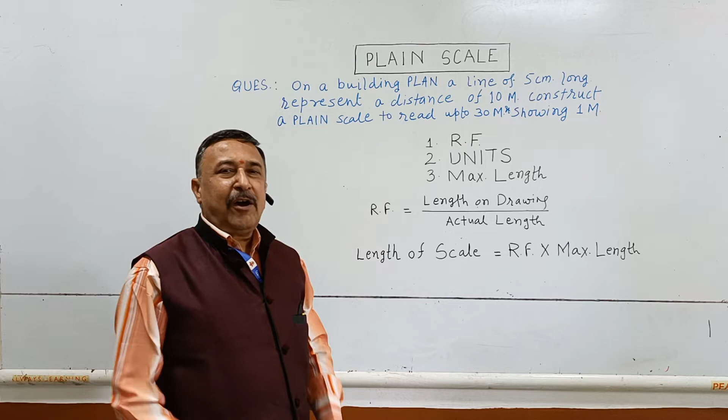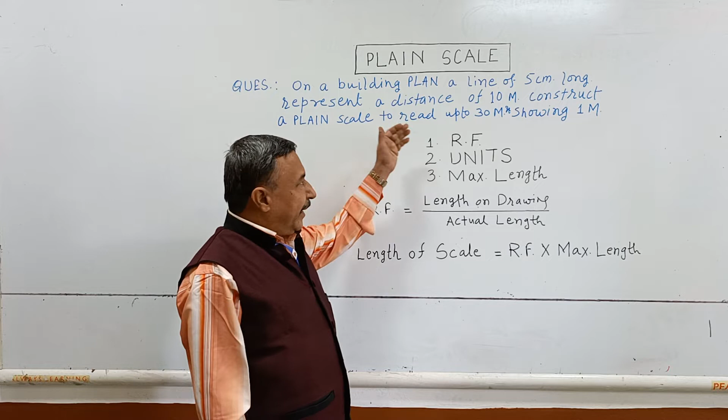Today I am going to solve a question of plain scale. As already everything is discussed in the last chapters, we know what is RF, we know what is units, what is maximum length. Okay, and these three are specifications of scales. Now just look at a question.

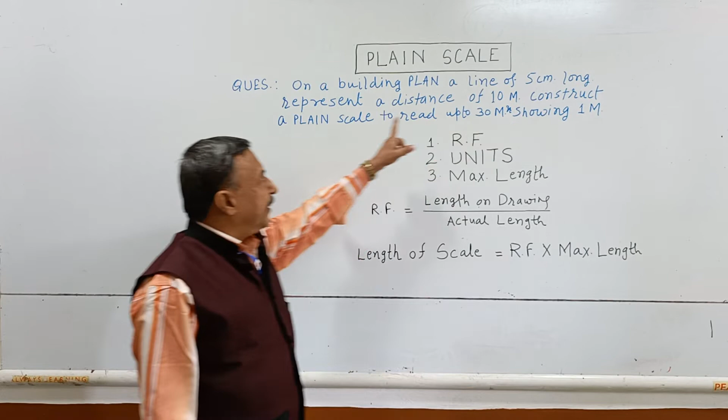What is our problem? On a building plan, a line of 5 cm long represents a distance of 10 meter. So by this line you can understand that a 5 cm long line on drawing represents a distance of 10 meter.

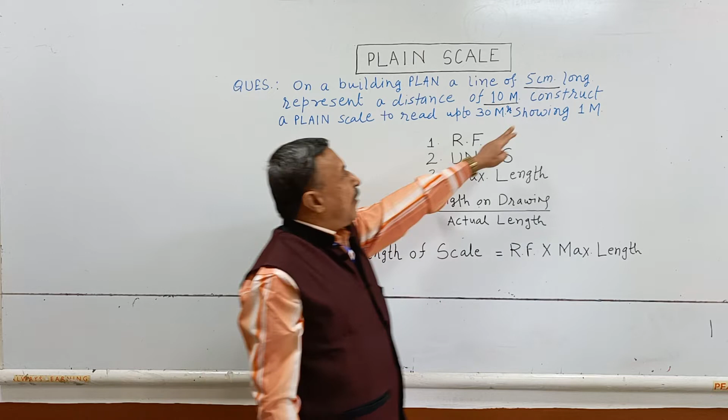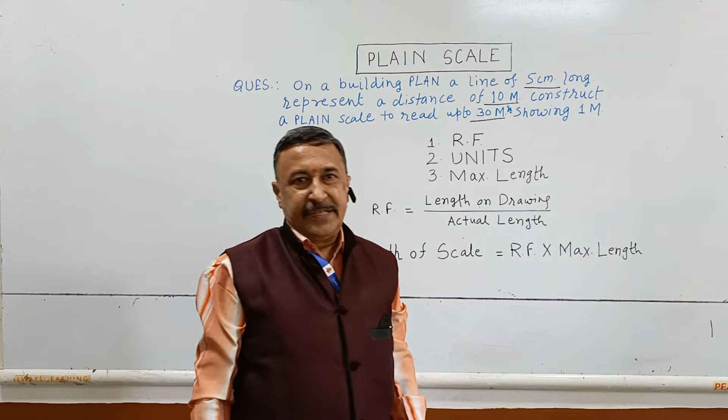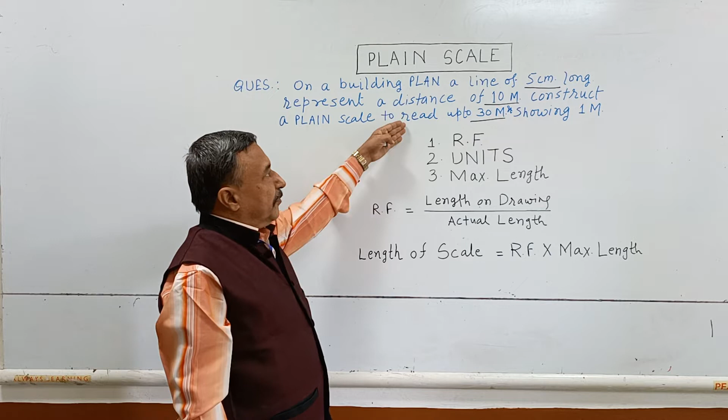Okay. Now construct a plain scale to read up to 30 meter. Read up to 30 meter means this is our maximum distance, and showing 1 meter. So the minimum distance we have to show on the scale is 1 meter. Now we start to solve the problem. Now see what are the steps in which we have to solve the problem.

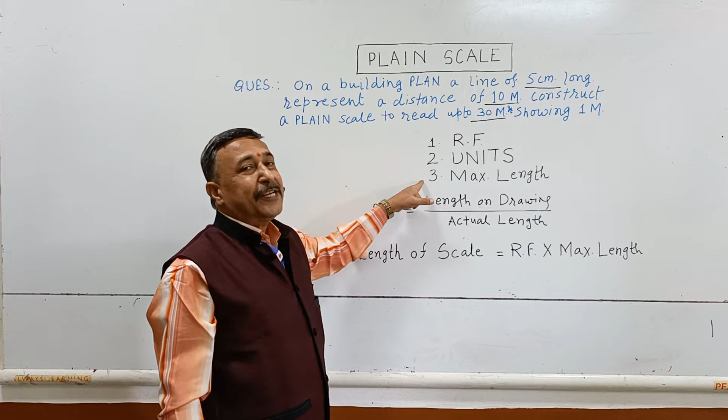These three are specifications of scale: RF, units and maximum length. And just think about this by reading the question. Now RF. RF is equal to length on drawing upon actual length. This formula we can use to find the RF.

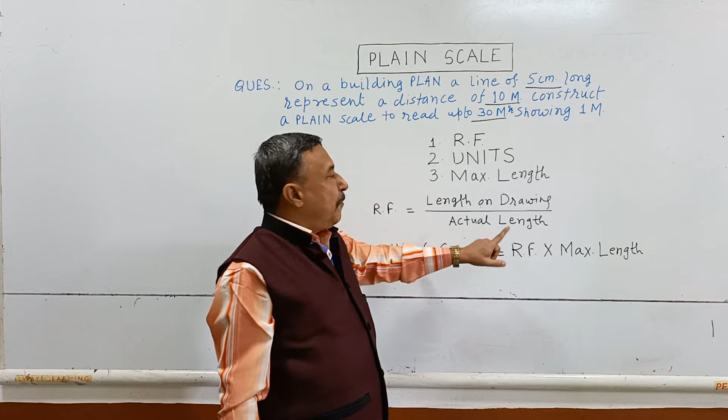Now see, length on drawing is given 5 cm and actual length is 10 meter. These two data are given for finding the value of RF. Now RF is equal to 5 cm divided by 10 meter. Now we can simplify it.

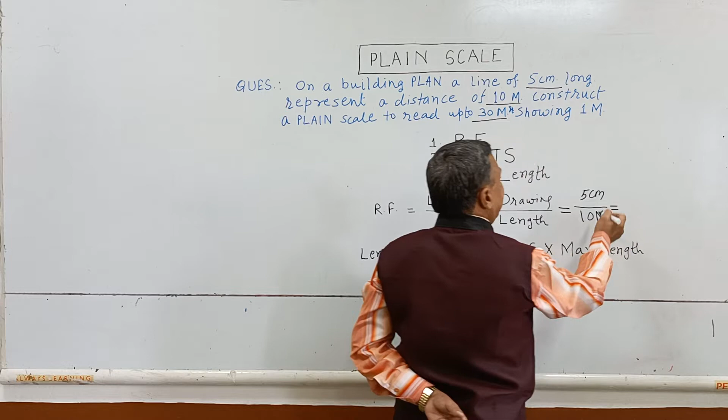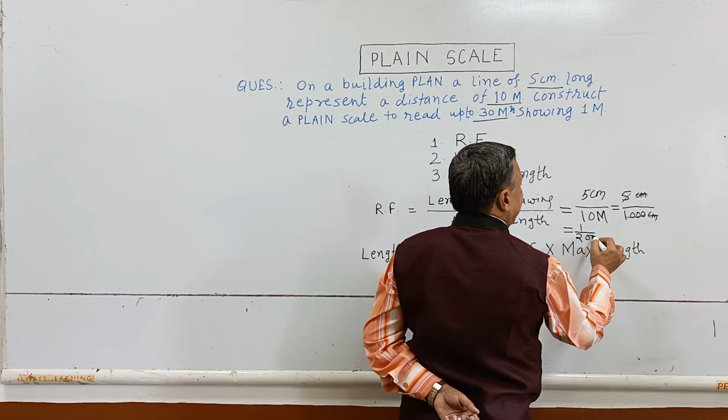Now how do we simplify it? We just convert this into centimeter, means both units can be cancelled. As you know, RF has no unit. So this is 5 upon 1000. We further simplify: centimeter divided by centimeter, this centimeter cancelled, and the final value is 1 upon 200. 1 upon 200. So in this way we calculate RF.

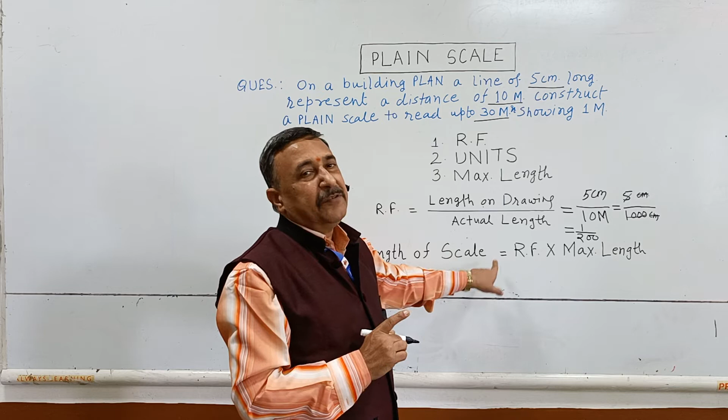Now the second step, we go to find the length of scale. This is very important, because if 5 cm represents 10 meter, then for drawing a scale of 30 meter, what is the length of scale? That we should find. So length of scale is equal to simply RF multiplied by maximum length.

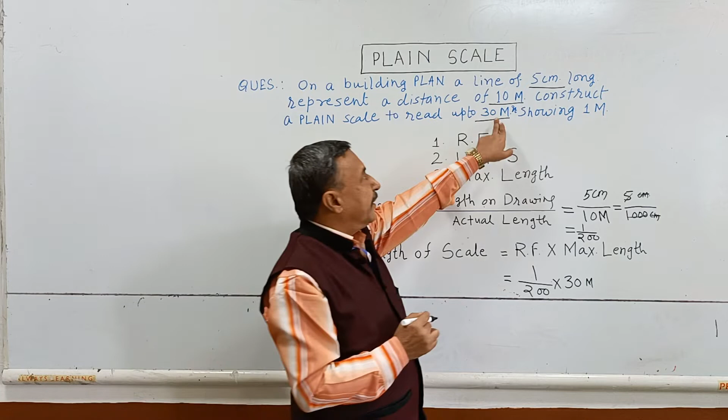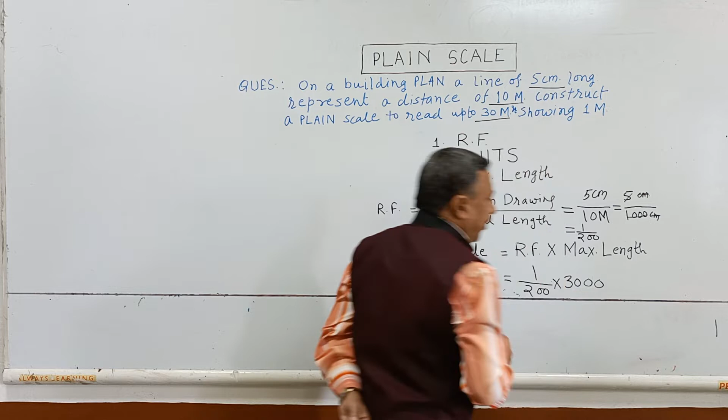So our RF is calculated here. So we write here RF, multiplied by maximum length, that is 30 meter. 30 meter is our maximum length. Now first of all we convert this 30 meter into centimeter, because we have available a conventional scale showing the centimeter unit. So we convert this into centimeter. Now further calculate.

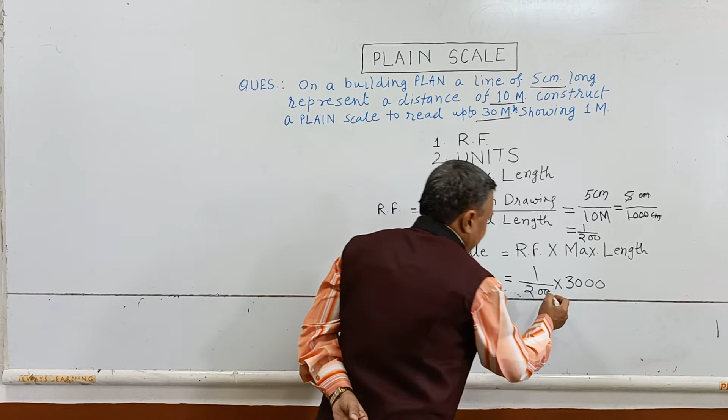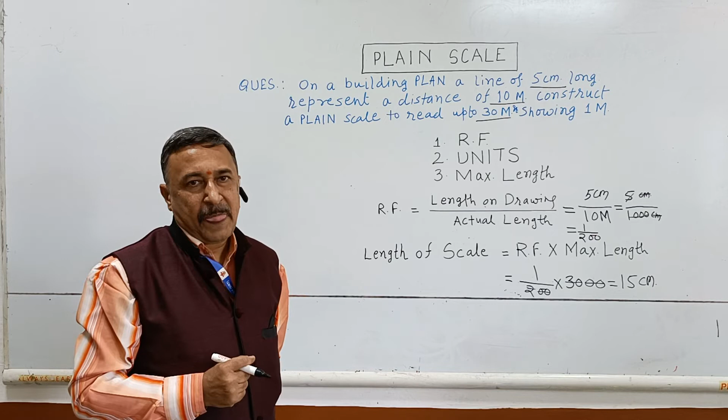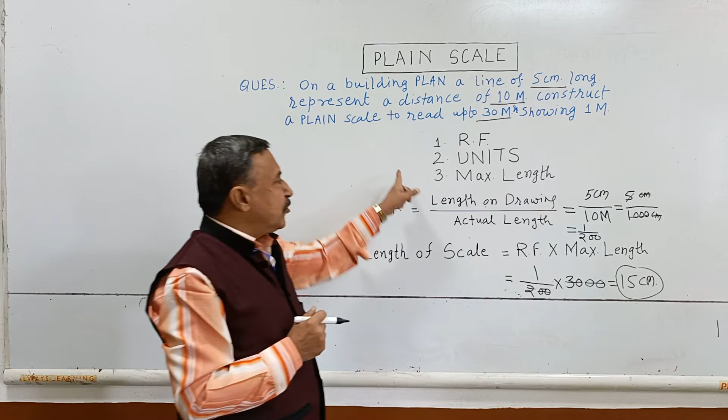We get 15 centimeter. So this is our main data which is used for drawing the scale. Now the length of scale in our case is 15 centimeter. Okay. So these two steps are compulsory to solve. After that we go for drawing the scales. Now we start drawing scales.

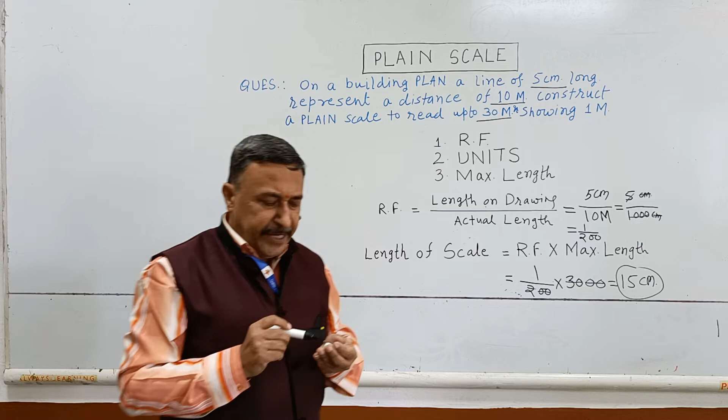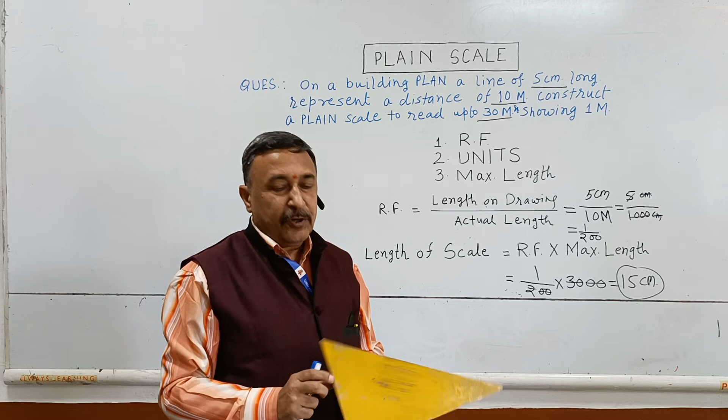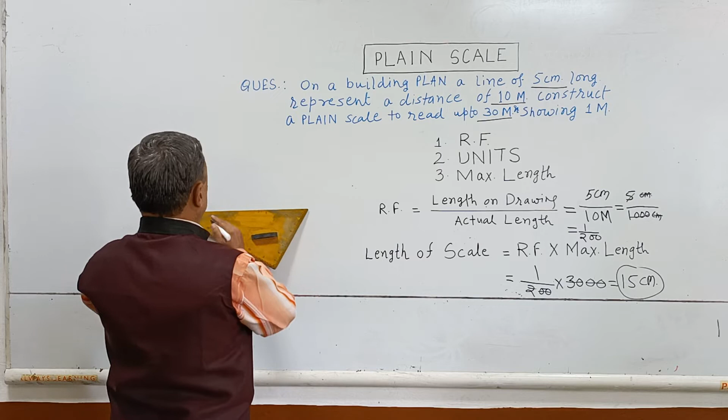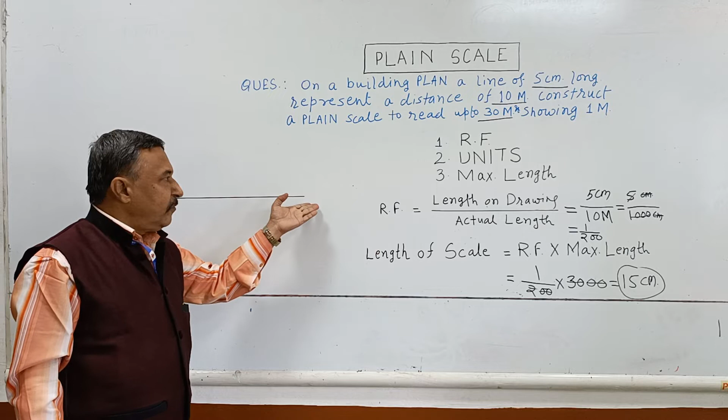The maximum length of scale is 15 centimeter. So draw a scale of 15 centimeter. This length is 15 centimeter. So simply construct a line of 15 centimeter. Now convert this into such a picture which gives the look of a scale. How?

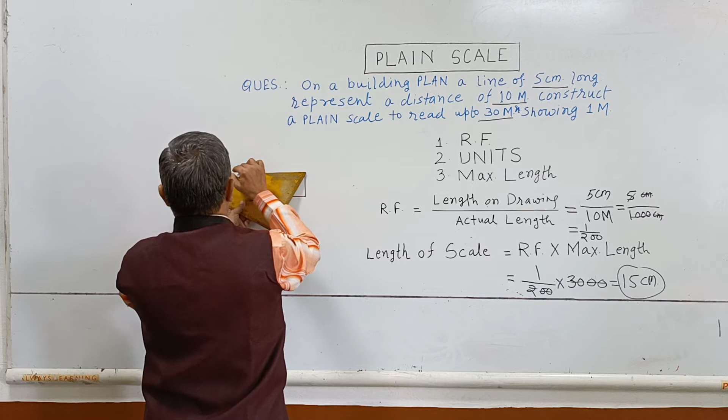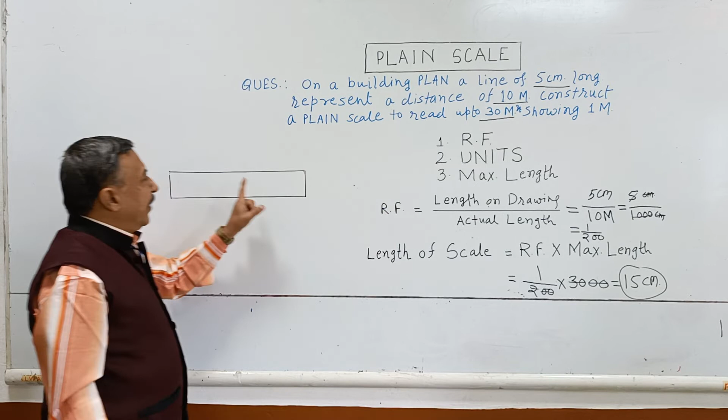Now see, this looks like a scale. So this is our scale of 15 centimeter which represents 30 meter length. Now we start to construct the scale. Now see here, showing 1 meter. So how do we find 1 meter from 30 meter in a plain scale?

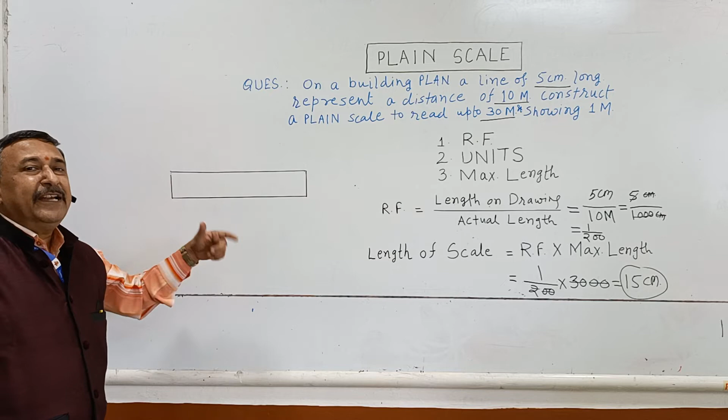As you know, a plain scale has 2 units. So what is the meaning of 2 units? It is twice divided. This scale is mainly twice divided. So first it is divided into some equal number of parts. Then again the first part is subdivided into some equal number of parts, so that we can show 1 meter minimum distance.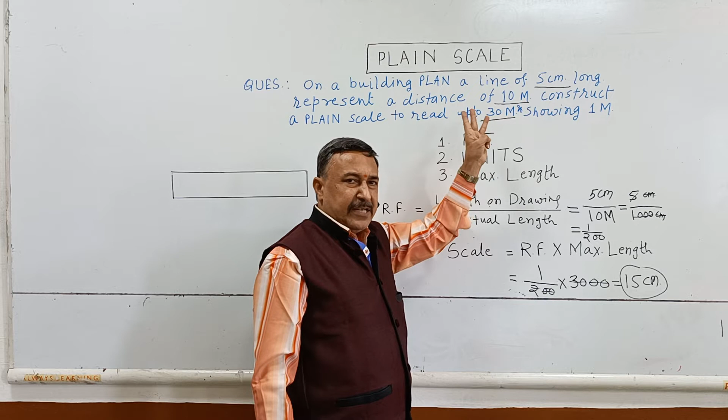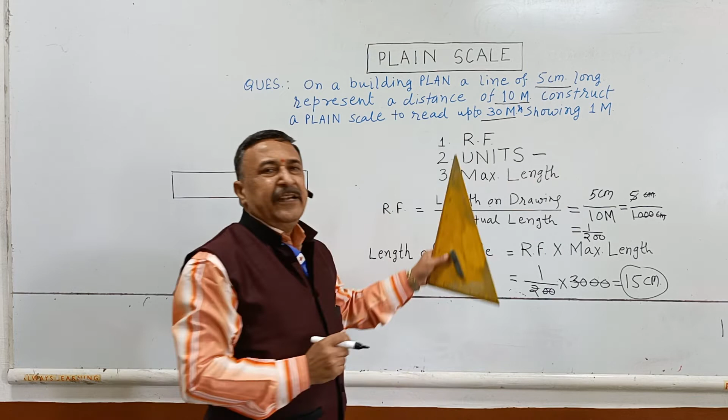So how? Now if we divide this scale into 3 equal parts, see here 30 meter is maximum length, and if we divide it into 3 equal parts, the 1 unit is 10 meter. So this is our first unit. Now if you want, you can show the units here. See, in the question the units are not separately given, so you can find them. Our first unit is 10 meter.

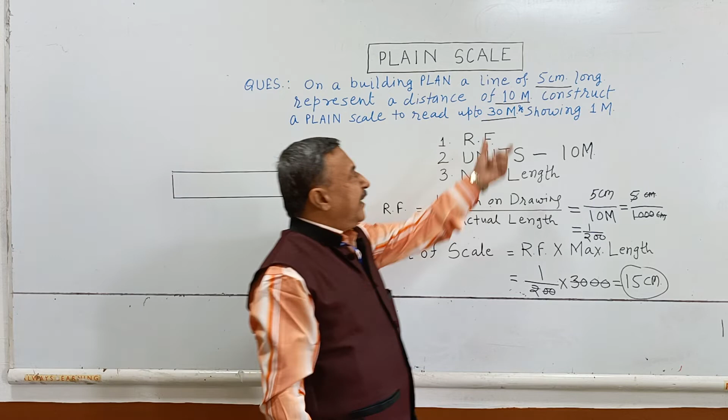Our first unit is 10 meter. And then if we divide this 10 meter into again 10 equal number of parts, we get 1 meter, which is our requirement to show on the scale. So our 2 units are 10 meter and 1 meter.

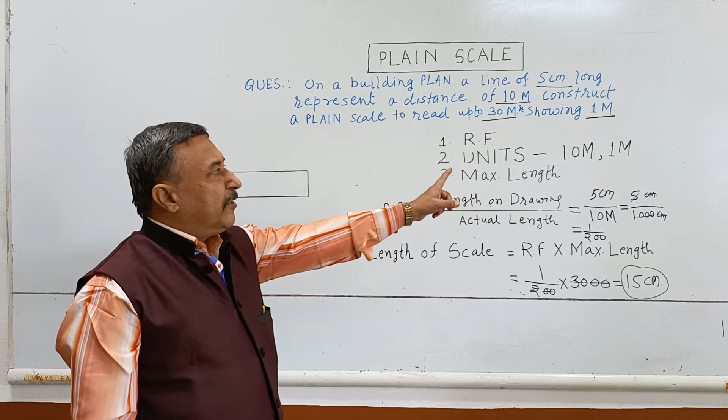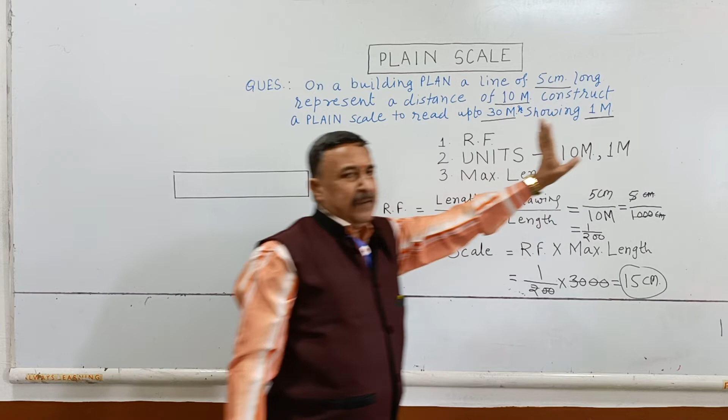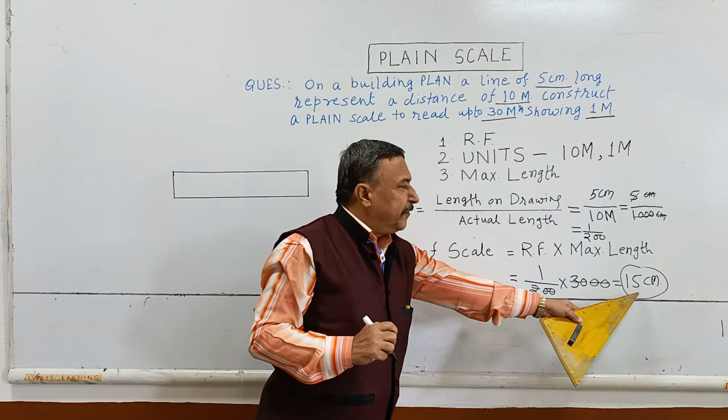So divide this into 3 equal number of parts. Then again first part is divided into 10 equal number of parts. Now we start to construct scale. Now divide this scale into 3 equal number of parts. So we can easily divide this 15 centimeter into 3 equal number of parts, that is 5 centimeter each. So we divide this into 3 equal number of parts.

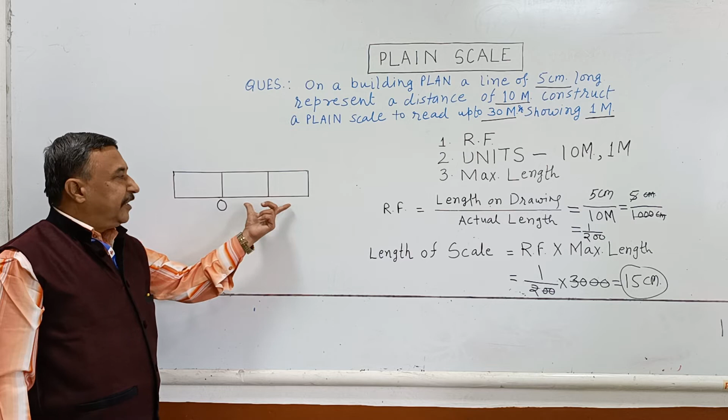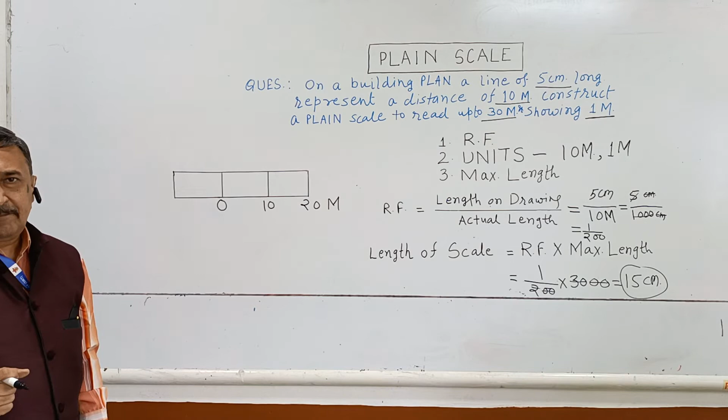See, so we start constructing scale. Now as you know, in our scales we write 0 here after first part, because this first part is used for showing second unit and these parts are used for showing first unit. So this first unit is 10 meter, so write here 10 and then 20 and write here unit also, that is meter. Okay, now this first part is again subdivided into some equal number of parts.

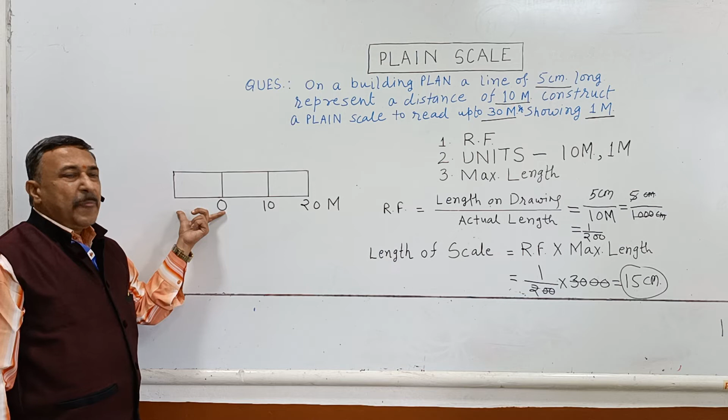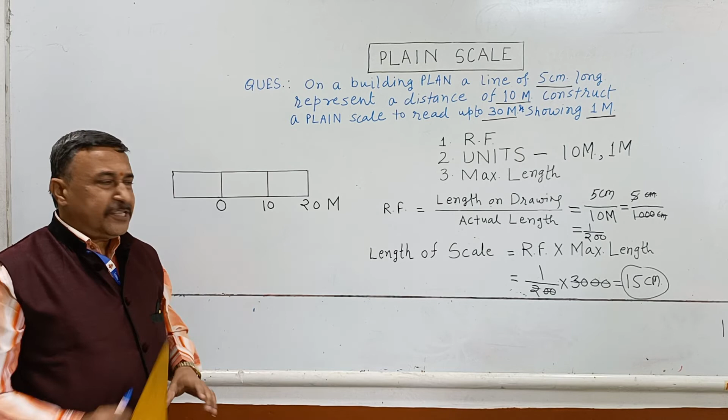Now if this is 10 meter and we want 1 meter, so obviously we divide this into 10 equal number of parts. Now as you know, the geometrical construction used for dividing this first part into equal number of parts, we use a construction division of line, which we already discussed in earlier classes. So I am constructing this construction.

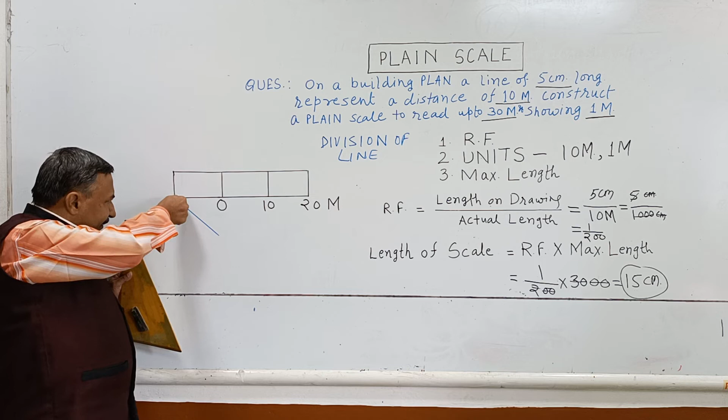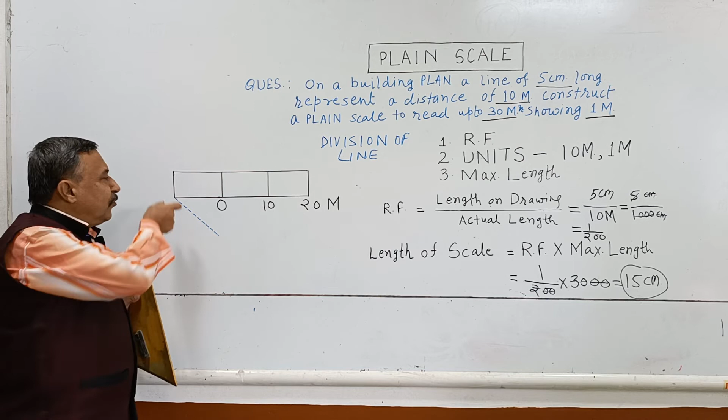How? Draw a line at any angle from this point. Then by compass you mark 10 equal divisions on this line. How? Like this. By compass you mark equal divisions on this line. Now join last division to 0.

And now we draw parallel lines parallel to this through each division. And as you know, the parallel lines may be drawn by using roller scale. So carefully draw parallel lines. Now see, in this way, this is divided into 10 equal number of parts. Okay? And the smallest part is 1 meter.

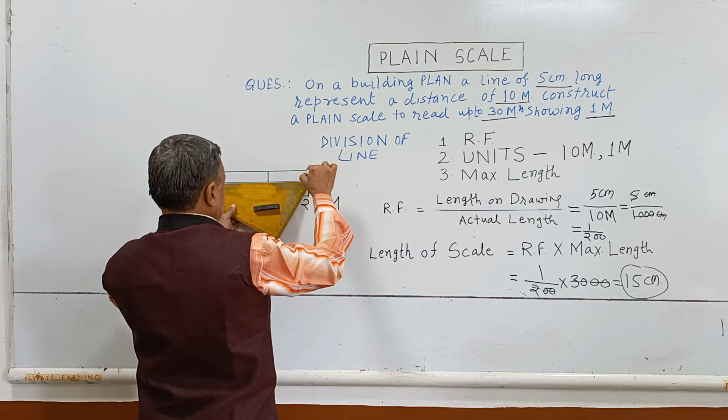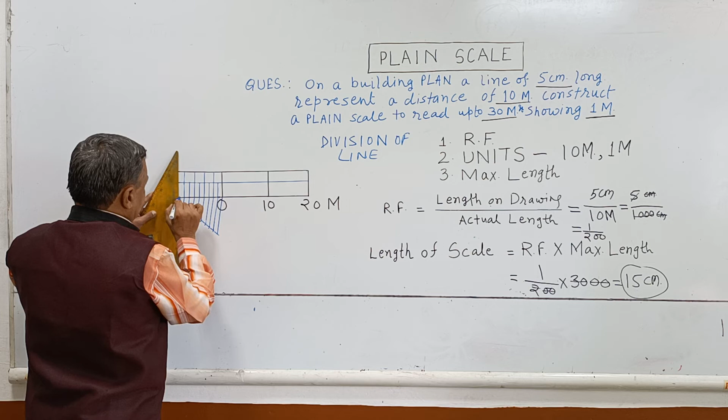See here, if this is 10 meter and we divide this into 10 equal number of parts, so small division is 1 meter. Okay? So our scale is complete. But some more construction we do for giving a good look of this scale. How? See here. This is a construction part. Now this looks like a perfect scale.

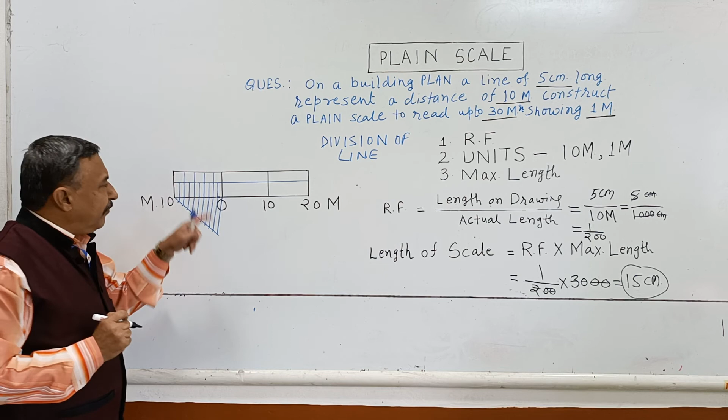Some more labels we have to give on it. For example, all units numbers like this. So 0, 1, 2, 3, 4, 5, 6, 7, 8, 9 and 10. So what is this? 10 again meter. Okay. This space is not comfortable to write every number here. So we can write alternately. Miss 1, write 2, 4, 6 and 8. This is sufficient for understanding the scales and its units. Now this scale is complete.

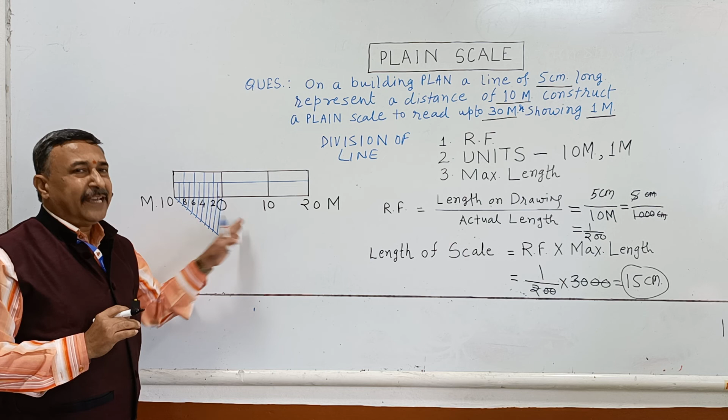Now see here, if I tell you to mark any distance on this scale, so test yourself that can you draw. I am showing here a simple distance of suppose 22 meter. How I show a distance 22 meter on this scale. Now see here, 22 meter is a combination of two units. First is 10, 20 like this and second is 1, 2, 3, 4. Now break it. 20 plus 2 is 22.

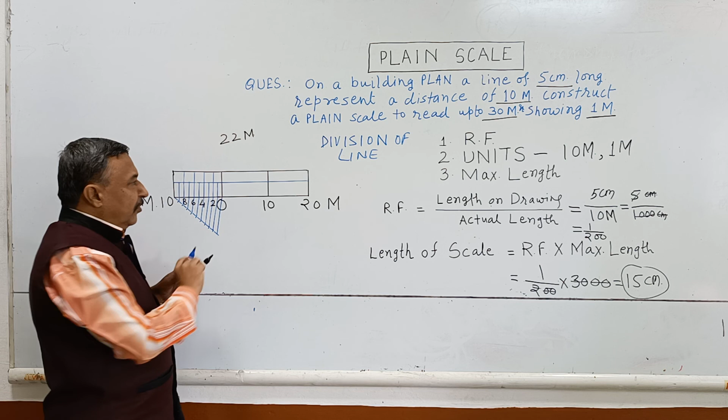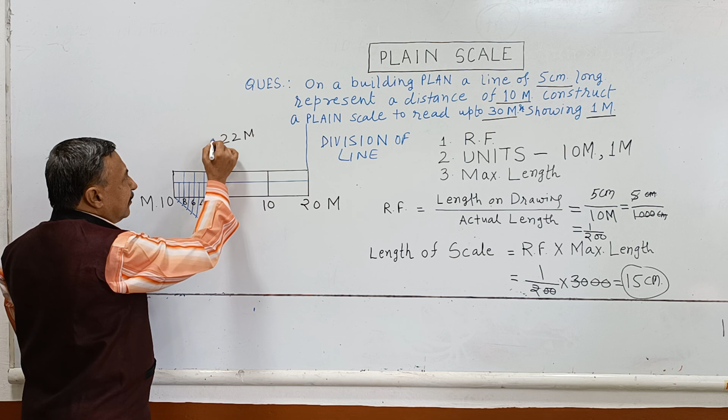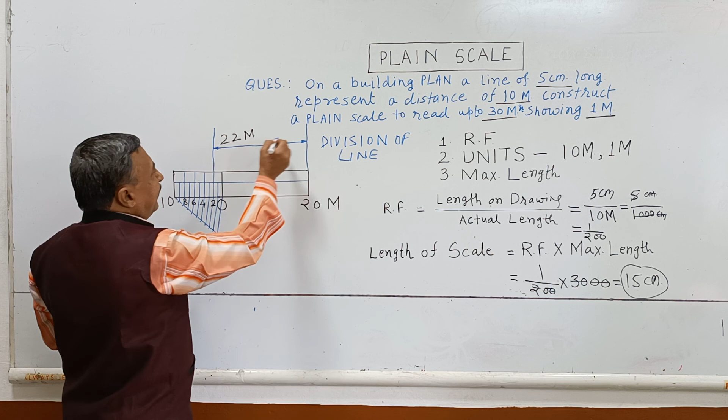So draw an extension line here. Then draw another extension line 1, 2 here. So this distance is 22 meter. Okay. So this completes our one question of plain scale. Now in next class we take one more question.